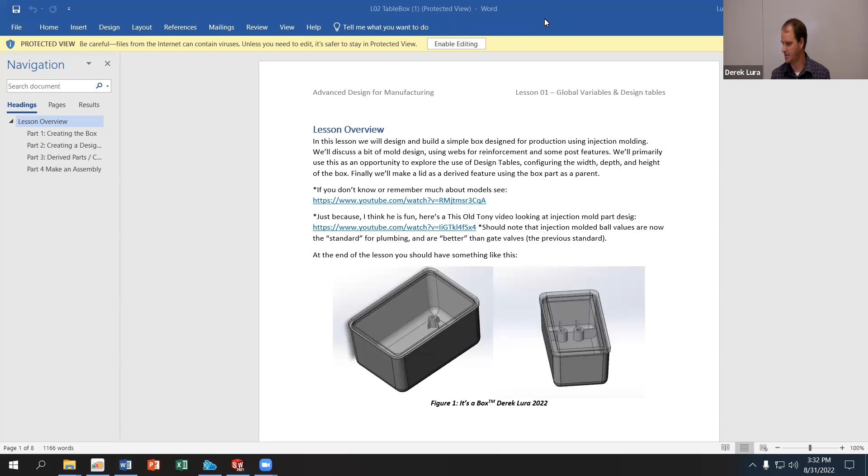We started this off last time with just a sketch on the top plane, and we did a rectangular sketch that is 100 by 60. Then we made that into a boss extrude. We added a 2-degree draft to that going outwards, so you can see it gets a little bit wider as it goes up. It's 40 millimeters tall, and you can see there we have the draft toggled on and we're going out.

After we did the extrusion, we rounded the corners. So we added, I think it was a 5 millimeter fillet to all 4 sides as well as the bottom face of the box.

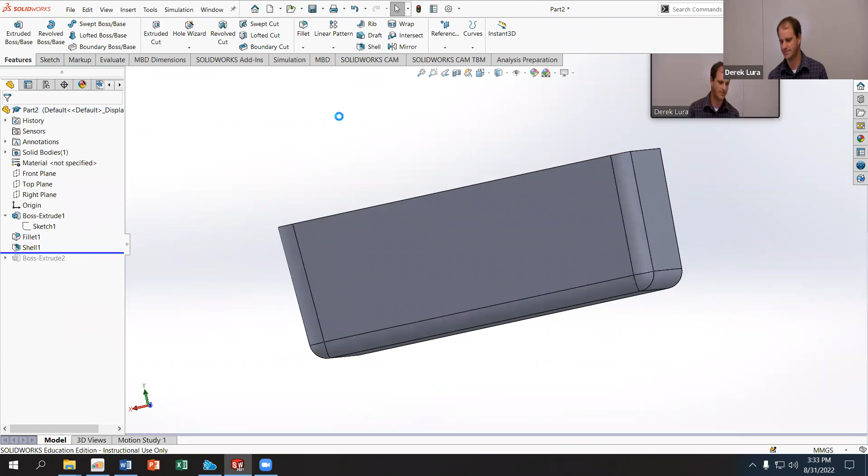Then after the fillets we shelled it out. We talked about the shell tool and how that works, and we used a wall thickness, I think, of 2 millimeters. 2 millimeters is actually a pretty thick box, so if you want something to be reasonably rugged, that will work fine. If you're trying to do just a regular enclosure, like if you think about a Tupperware or a leftovers container, usually there's going to be like a 1 millimeter wall thickness because they're usually pretty thin to save material, and they don't need to really support a load. So 2 millimeters is actually pretty thick for just an enclosure.

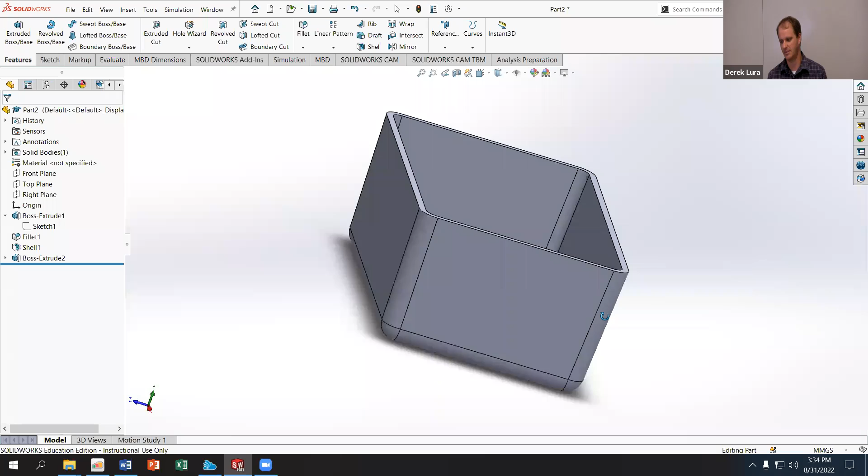After that, we added a boss extrude that we're going to use as a mounting point for something to go inside the box. We haven't really added any features to that, but we did cover some of the options in the extrude. We had it come starting from the face on the inside bottom of the box, and we had to go 8 millimeters up from that. We included the same 2-degree draft, and we had that draft go inwards because we want all the surfaces going in the same direction so we can remove this part from a mold at some point in the future when we decide to do that. So any questions on any of those steps? Does anyone need to repeat any of those or anything like that?

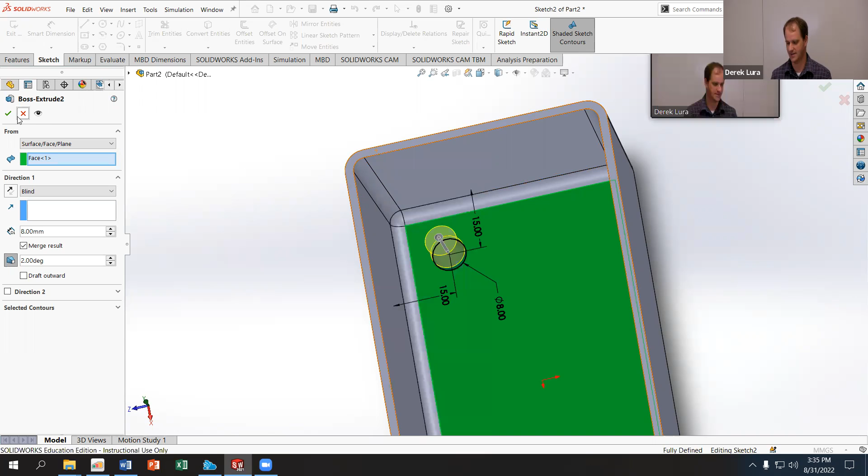For the peg, what we're doing is we're starting from the bottom surface here, and it's just blind from that surface, so this 8 millimeters. Oh, for these 15 here? Yeah, those are going from the outside of the top edge of the box. So if I look at the sketch here for this one, you can see it goes to the outside of the top edge of the box. And it's going to be 8 millimeters at the base, and it's actually going to be a little bit thinner than that as it comes up.

The next thing I'm going to add to this is a rib. A lot of times we use ribs to reinforce parts, so we can have something thin but also make it stiffer by adding a rib to it. You see this very commonly in injection molded parts. Ribs can also help with material distribution, adding an extra channel that plastic, or even metal if you're doing some kind of die casting, can flow through to help distribute material more efficiently through a part.

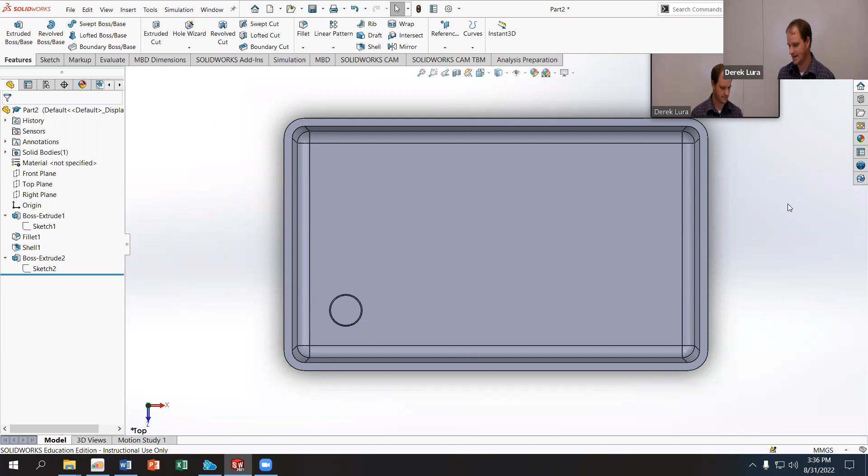In this example, we want to add a rib that's going to connect our support to the side walls of the box, just like shown here. The nice thing about ribs is all we really have to do is specify where we want them to start on a plane, and then draw one side or the center of the ribs, and it'll calculate the endpoints for us. So I want to show you guys that real quick.

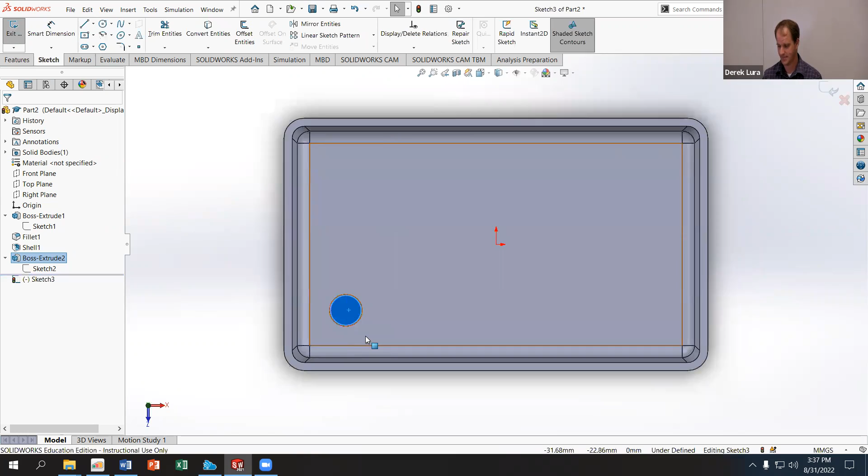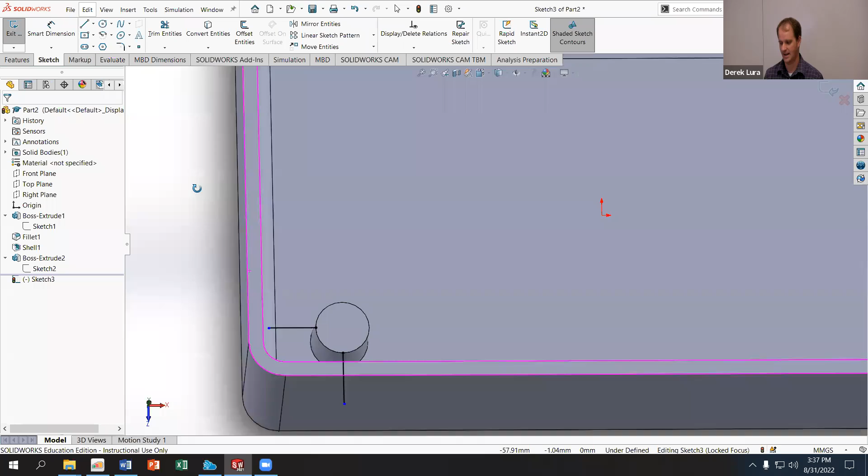I'm going to have this sketch on the top surface of my support because that's where I want my ribs to start. I could have them start anywhere else, but in this case I want them to start there so they're all flush with the top of my circle. So I'm going to right click on that and sketch on that surface. I'm going to draw a line that goes from the bottom of my peg out towards the side of the box. It doesn't actually need to go all the way. Then I'm going to do the same thing going from the side of the peg out towards the side of the box. Once I have those two lines, you can see them there, and I can see that they are on the top of that surface.

I can go to my features and use the rib tool. I specify how wide I want these to be. I think I want them to be 2 millimeters so they match the size of my box, but let me check what I used inside the walkthrough. Looks like I used 1 millimeter for the thickness in the actual walkthrough, so we'll use 1 millimeter and then we'll draft out.

So 1 millimeter, and you can see here the rib thickness. You can make it go on one side of the lines, the middle of the lines, or the other side. It's a little bit complicated when you have a bunch of them on there as to which side gets used, but pick what you think is best.

We want to draft this. I'm going to do a 3-degree outward draft, and I want outward because I want it to get wider as it goes down. On the peg, we did an inward draft because it got narrower as it came up. We'll be able to see that a little bit better once we generate it.

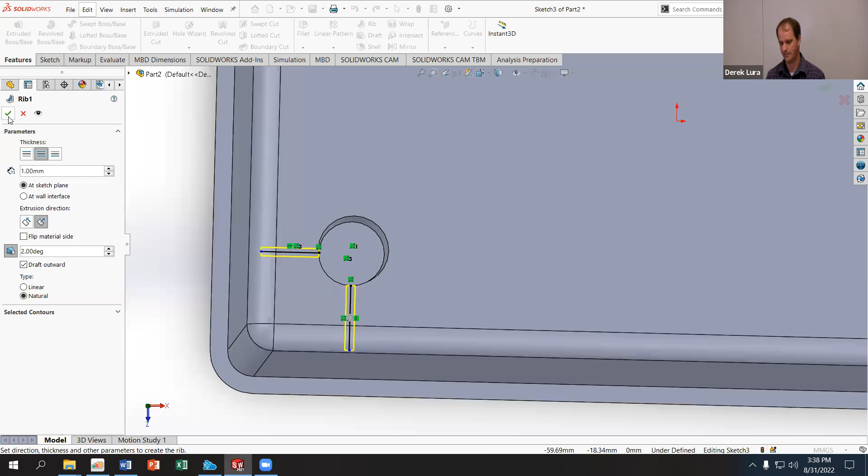So note here that the end of the rib got filled in. I didn't need to extend that rib all the way to the side, which is nice, because in my drawing, that line - I don't know where it would end up intersecting this plane. So it's easier for me to have that line kind of end before it gets to the wall, so the tool is not confused as to where it should end. It just needs to end whenever it hits a face. Does that make sense to everybody?

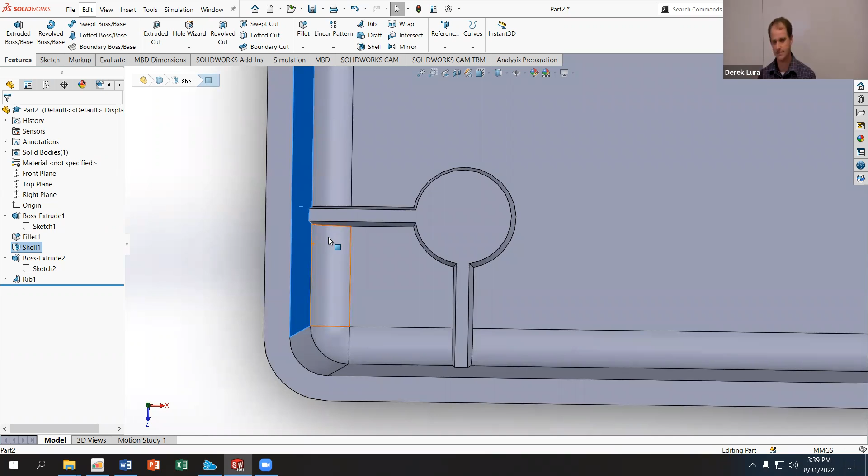And I can confirm that my draft is going in the correct direction because you can see that it's getting narrower as it comes up. Anyone like me to repeat that real quick? Or even repeat it real slow?

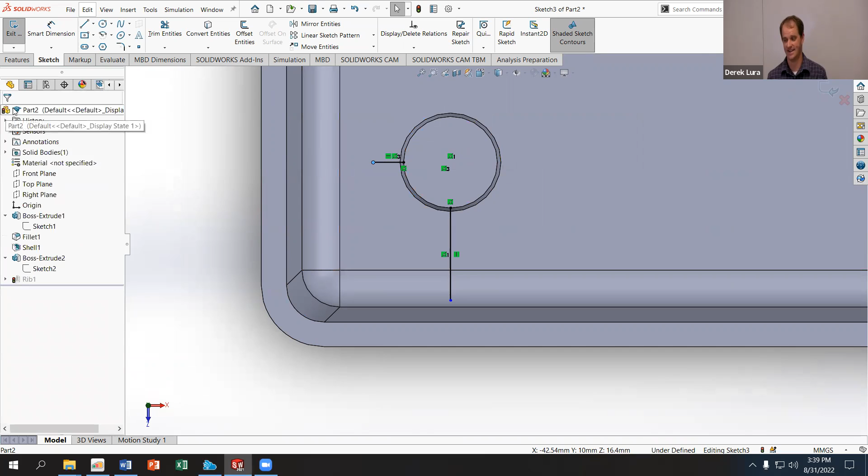Yeah, we want it to end before it gets to the sides. And I could drag this out to here, but then it gets confusing about whether that's going to come out past the outside of my box. Because I don't know - the wall of my box is somewhere between this line down here and this line up here at the height that I'm drawing this line at. So I don't really know where the end of this needs to be on that surface. But I don't need it to go very far at all, because it's going to project that line out until it contacts something. That make sense?

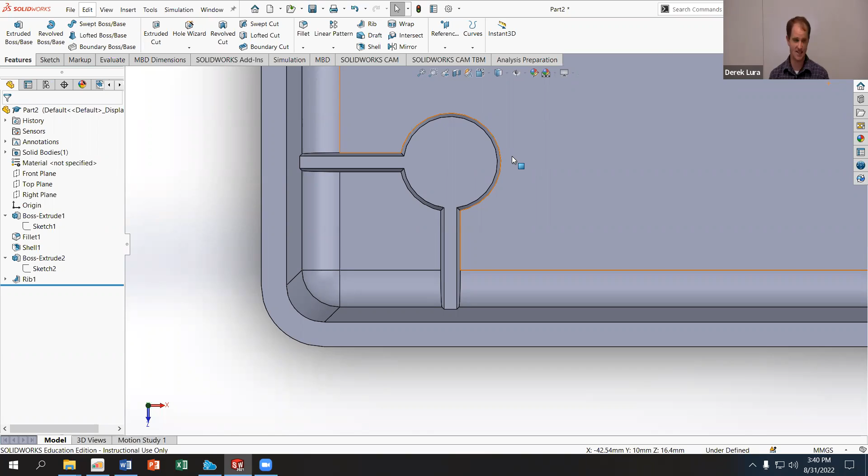Ribs are almost entirely inside parts, but they don't have to be inside something that's totally enclosed. You can have it start like on a shelf and then go down to a lower shelf and it'll fill down below - it just needs to have something below it for it to work. You can also specify ribs to go in a different direction than how you sketch them if you want to, but most of the time you want to sketch them on the plane that you want the rib to start. But if I wanted to have a rib that went kind of opposite direction because of the geometry I'm trying to get, you can do that.

I'm going to add a hole to this so I can actually mount this part. I don't remember what size hole I was going to use. Metric M2 X 0.7 - that X on the 0.7, that's the pitch of the thread in metric. So we're looking at an M2 hole and probably threaded using just an ANSI default.

So to get that, I'm going to go into features, hole wizard. I want a metric screw. I'm going to do a tapped hole, and then go to my M2 and look for an M2 X 0.7. I don't have an M2 X 0.7. Is it M4? I said M2.

Oh, it must be a typo. It's M4 in the picture, which is probably correct - that should be M4. I don't know why, it still says 2... 4, oh, I'm not editing, that's why. That's okay, let's do M4.

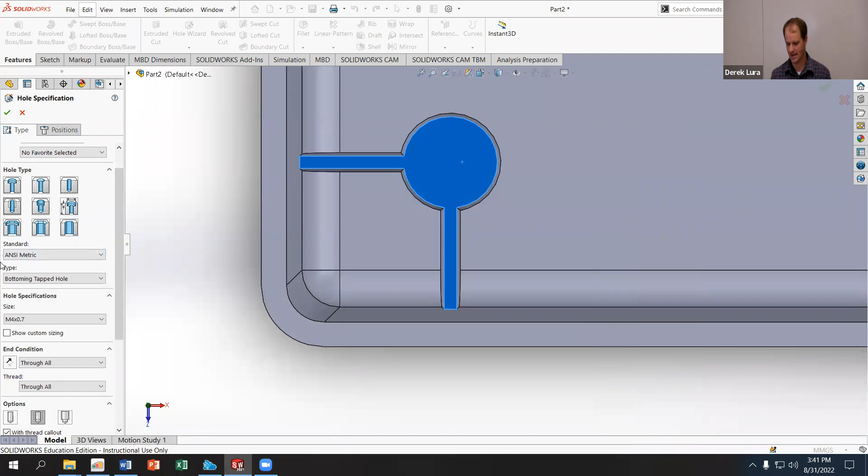M4 X 0.7. The position, I want it to be in the center of this. I'm going to highlight over the edge of my circle, wait for that kind of center point to pop up, and then click on the center point. Then all I need to do is specify how deep I want this to be.

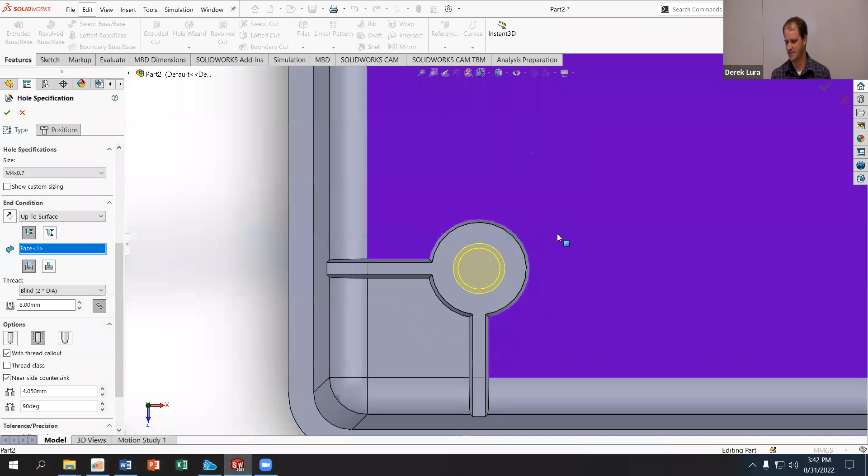So I'm going to go to my options, and it looks like this. I want it to extend up to the original bottom of the part, so instead of using through all, I'm going to do up to surface, and then click on the bottom surface of my part. And you can see that it actually ends that hole right at that position.

And then I'll accept that. This one has a near side countersink. I don't know if the one inside the sketch has a near side countersink. Looks like it might.

If you don't want the near side countersink, which is this little fillet on the top, you can go into the tools for it. My SolidWorks is freezing, let's give it a second. There it goes. You can edit, scroll down, find the near side countersink, and just toggle it off.

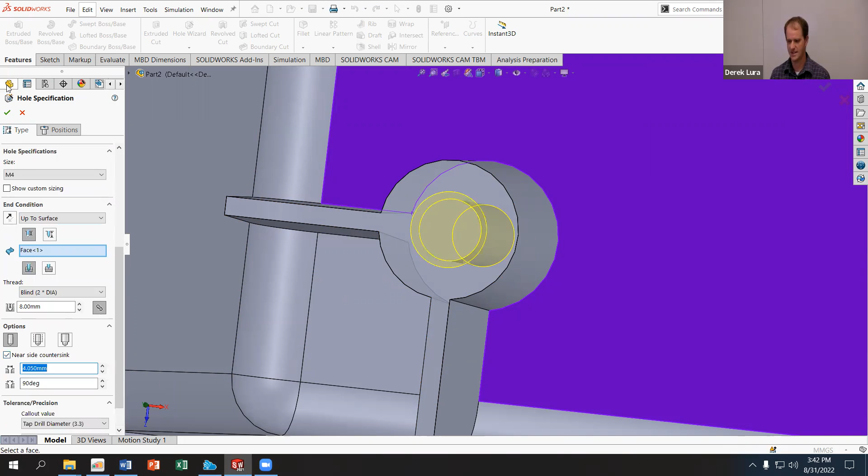Just like countersink is actually nice to have. It makes it a little bit easier to align the screws. So especially something like this, where if you're going to be putting a PCB, a circuit board, into an enclosure, getting the screw to line up just exactly right can be difficult. So having a little bit of a countersink there can help you line those up a little more easily.

Oh, and you okay back there? No? Crash? Waiting for it to reload. It's crashing on a repeating basis. Yeah.

I think all the way to the front, and then yeah. Great, you're doing that already.

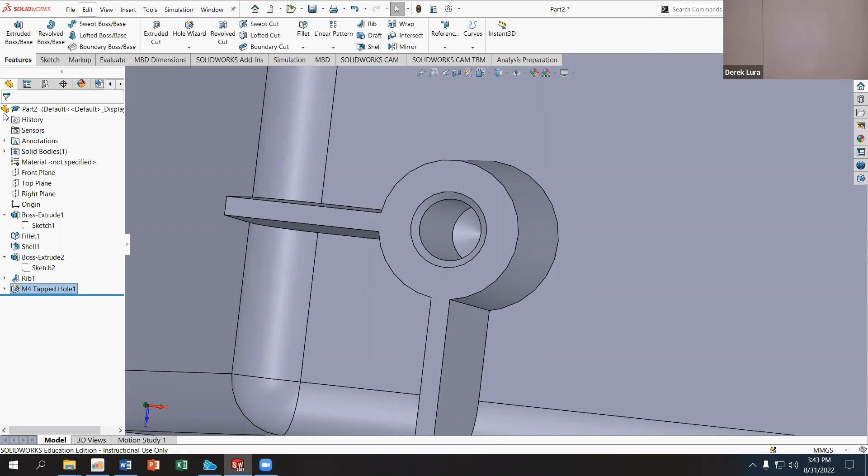So I'm going to click on my boss extrude, my rib, and my hole. All those, as well as my... I can use the front plane or the right plane, doesn't really matter which one I start with. Oh, wrong selection, I want to get all those and my right plane. And then click on the mirror.

The nice thing about the mirror tool is if you have one plane and a bunch of features selected, it's going to automatically know which one to use as the mirror plane. So I'm going to accept that.

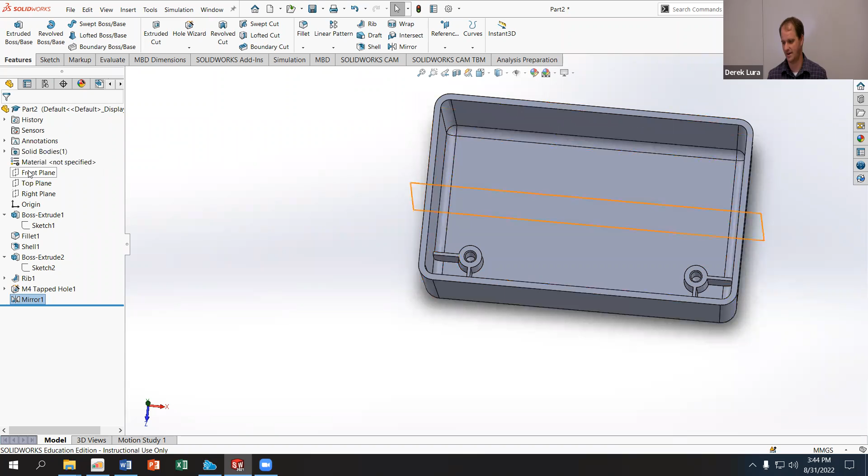If that didn't work for some reason, I'd try using a geometry pattern, just as a note. So if you try and mirror something that doesn't work, try mirroring it as a geometry pattern. It should work fine. I'm going to mirror the mirror to get the other side.

And now I've got a nice box set up right there. Good.

All right, I want to show how to use the mounting boss tool in case you do end up in a situation where you're designing something like this and you want to expedite the process a little bit. It's pretty easy to use.

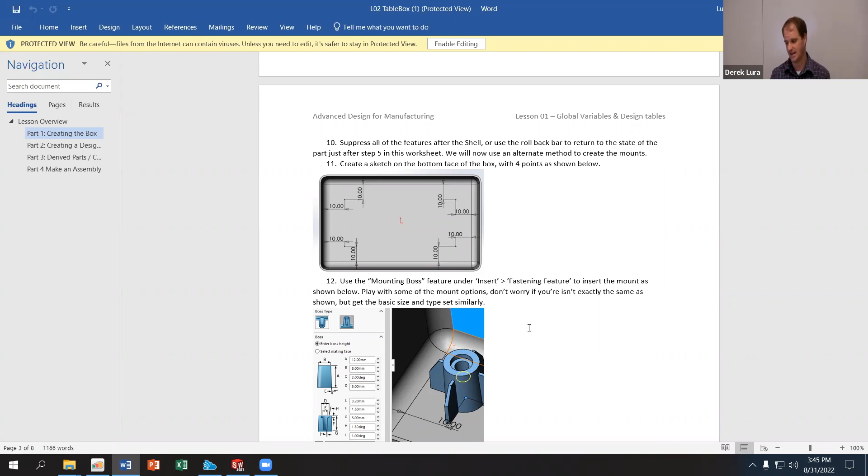All we have to do is specify the size of the boss we want to use and the locations. So what I'm going to do is suppress everything after my shell.

And then I'm going to do a new sketch on this bottom face. Let me see that sketch there. And then on that sketch, I'm going to define 4 points: 1, 2, 3, 4. I'm going to make all those points at 15mm distances from the sides.

You may be thinking, can't you just do that and mirror it? Yeah, I can. But the way this tool works, I specify the parameters that I want for each of the mounting points. And then I specify the parameters that I want. So it's pretty easy for me to generate a lot of different mounting points using this tool.

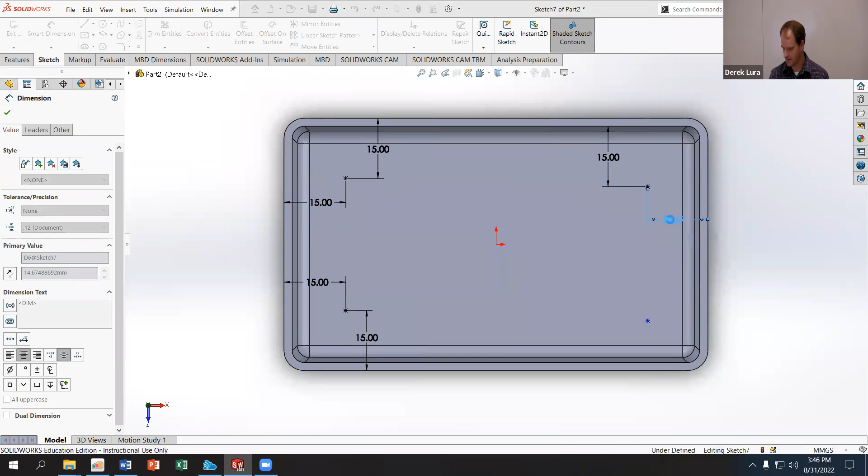Hopefully it makes sense to you all that if I was doing this for real, probably I wouldn't want all these positions to be mirrored exactly. I would probably want specific positions for each of the mounting points, as a function of what I'm putting in place. And so specifying the locations like this makes it a little bit easier for me to scale this to something else in the future.

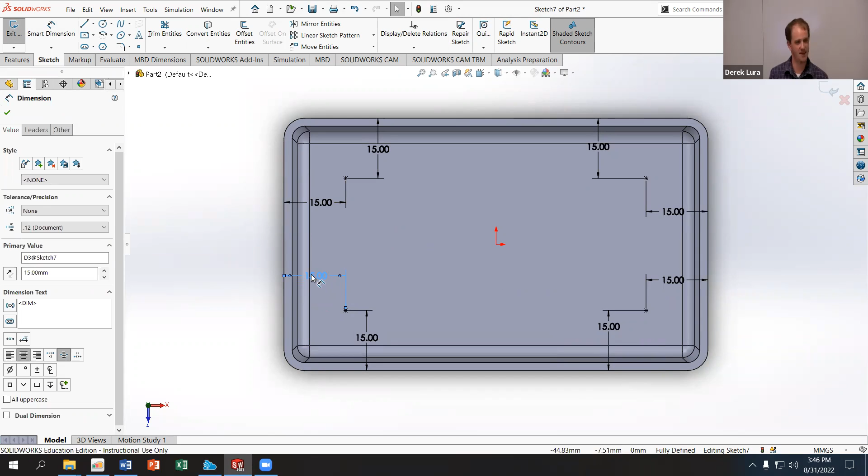I've got 4 points, all of them 15mm from the sides. If you want to use something besides 15mm from the sides, as long as it's reasonable and close to what you have here, it'll work out okay. If you get it too close to the middle, when we shrink this later, that'll be a problem, but don't worry about that right now.

Everybody good? Everybody will get, maybe except Owen, everyone will get the 4 points on the sketch? All right.

So this tool, if you don't know where to find something, again, I suggest using the search command. So if I search for mounting boss, I can show that right there. I should be able to just click on the little icon and it'll show me where to find that tool. So I'm not using my mouse right now. I just clicked on the little eye and then I waited for the computer to say, hey, it's over here.

I like the way that if you don't click on it right away, you just wait. It's just a little arrow. I'm gonna do that one more time so you can all see it. I searched for mounting boss in this tooltip, and then I clicked on the eye, and then I didn't touch anything. I'm not touching anything. And it just highlights it. It's right there.

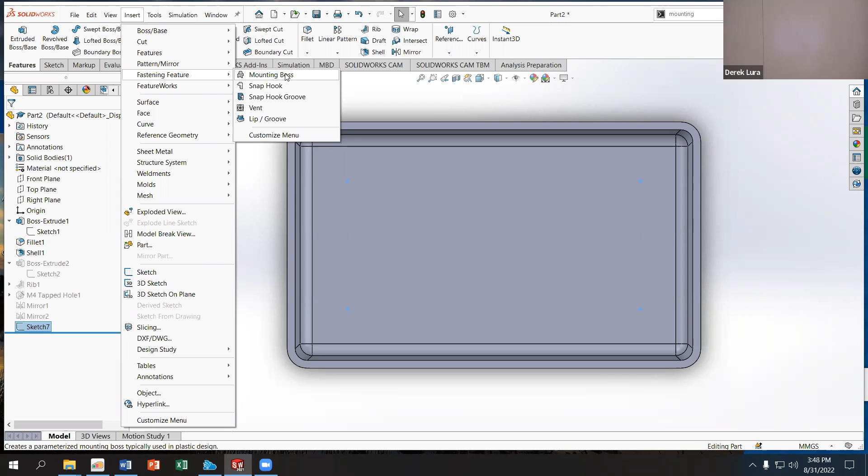Now you don't have to actually search for it. You can just click on it from the search and it'll open the tool for you. Most of the time, if I have something that's not inside my default bar here, I'm not going to bother finding tools for it. I'm just going to do search. There it is. Click on it and I've got the tool. All right.

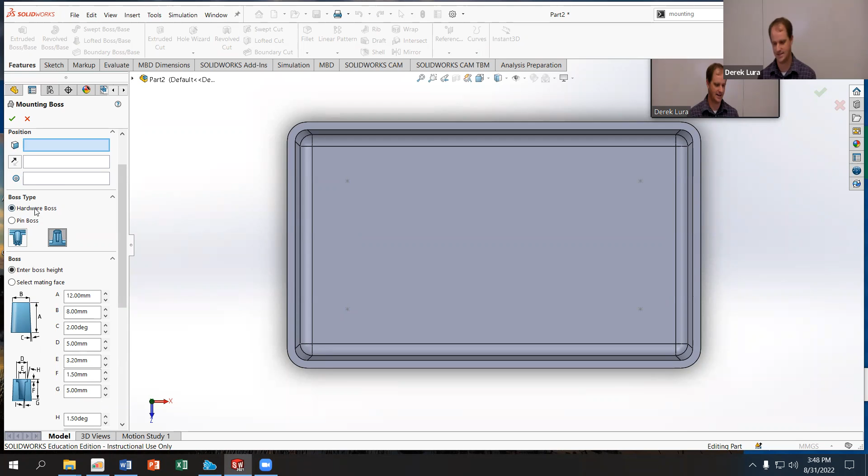So here's the different options here. So we have hardware boss, pin boss. We can have a head or a thread. It better matches what we had before if we use a threaded boss in this case. And my positions, what I want is I want the points on my sketches here.

Did I use a sketch pattern on this? Maybe I used control. No. Let me check my notes. I did do a sketch pattern. Okay, never mind. I'm just going to do one and then I'm going to pattern it. I think I just did that to show you guys how it was. So that gives me the position of the first one.

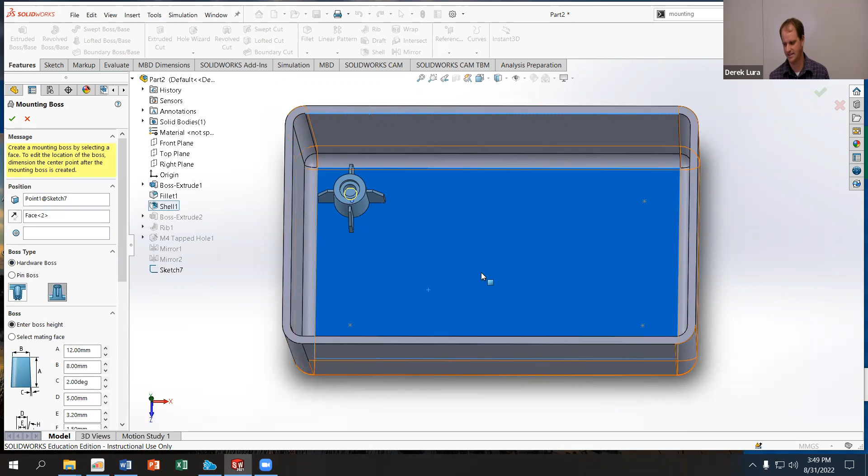I don't like them having this arbitrary orientation. So I almost always specify the direction of it. And you can use, I think, any face for this. Ooh, that's not good. We need a flat face. Where's my alignment? Oh, here are the fins. There you go. So this is the position, this is the orientation of the actual mounting hardware. Then I scrolled down to the fins and I made them align with this edge. And that just keeps them nice and square.

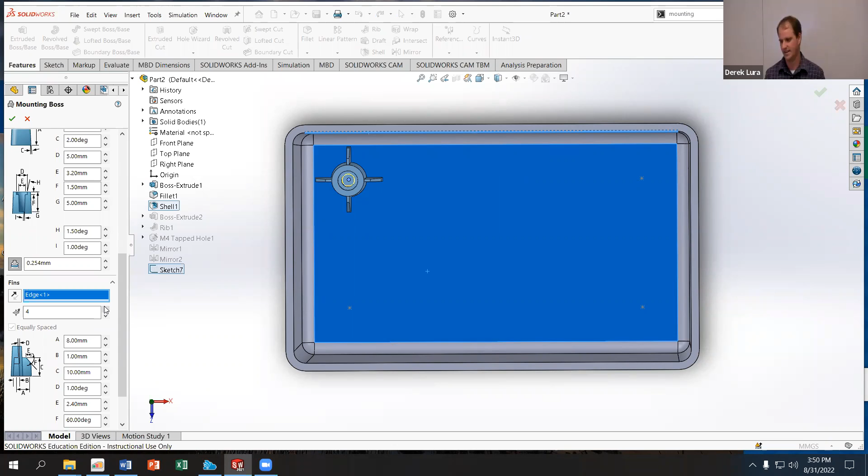You notice you can change the number of fins here if you want a stronger boss or a weaker boss. It's up to you. And again, how much force, and specifically lateral loads or bending moments, are going to be applied to that will determine how thick and beefy you want the fins to be relative to the main post.

Now here we have the boss height. I actually want this to be 8. And then if I want to change the other values, I can modify them as much or as little as I want to. They need to be based off of the height. So if you go too far off, it's going to complain at you.

So let me do this whole thing one more time. So I went to the mounting boss tool. The position, I picked on this face or the point. The alignment outwards is normal to whatever face you selected. And then the fins, if I scroll down to the fins, I can click on the direction arrow there. And then I use this top edge to align the first fin.

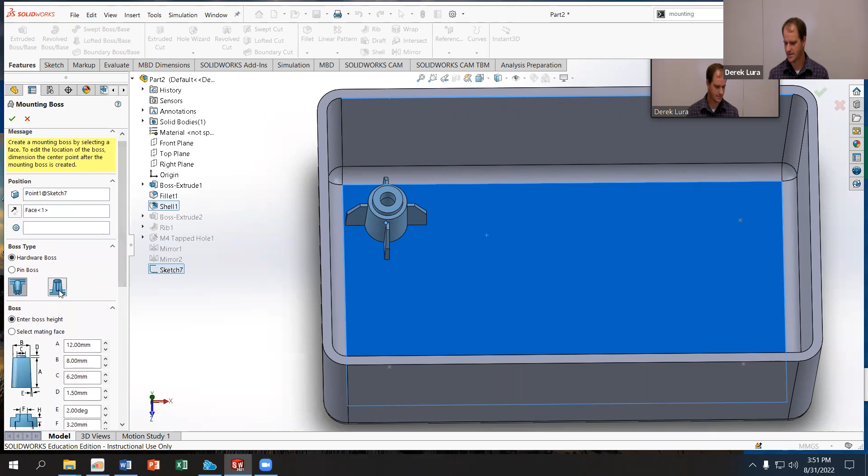You'll notice that we'll always have one fin parallel to that line if I do that. And the rest of them are just equally spaced. You notice this equally spaced is kind of hard checked on. I can't uncheck it. Or it's probably good. I thought there was an option here to specify the screw size. No, I don't want pin. I want it to be threaded.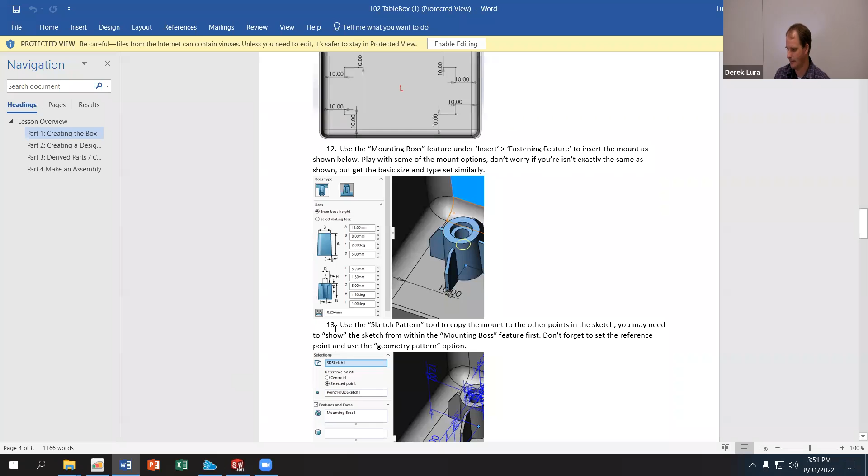The E is the actual hole size in the pin. And right now it's 3.2. So that's all the parameters. You can save these out. I don't know why they don't have defaults for different size screws. They probably should. Doesn't matter that much though. I think in the sketch I just use the default. Yeah, I just use the default sizes. So I just use a hardware boss of the default size.

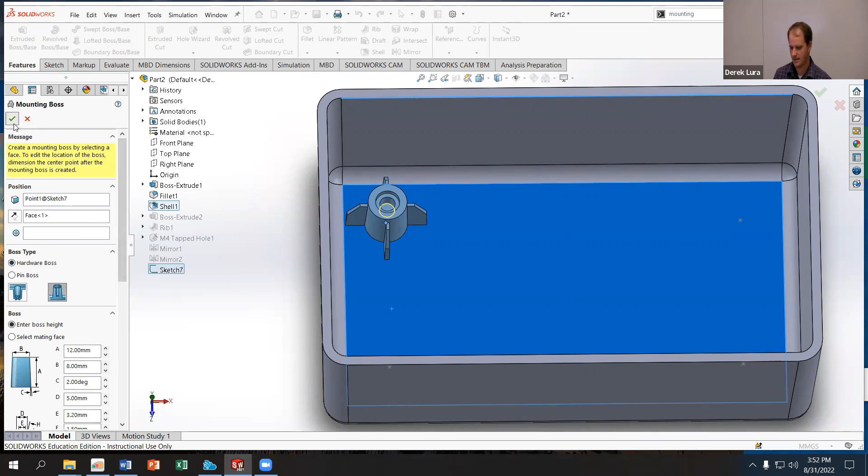What did I click? I clicked on something I wasn't supposed to. I probably changed one of the sizes of the fins or something. I'll just hit cancel. I'll go back in, I'll do it one more time, and I'll leave all this stuff default. Go. There's one. And then what I'm going to do is I'm going to pattern this using a sketch pattern on the pattern.

Oh, I didn't actually change the size of the face. You make that 10 probably. I think it has to be bigger than this. Yeah.

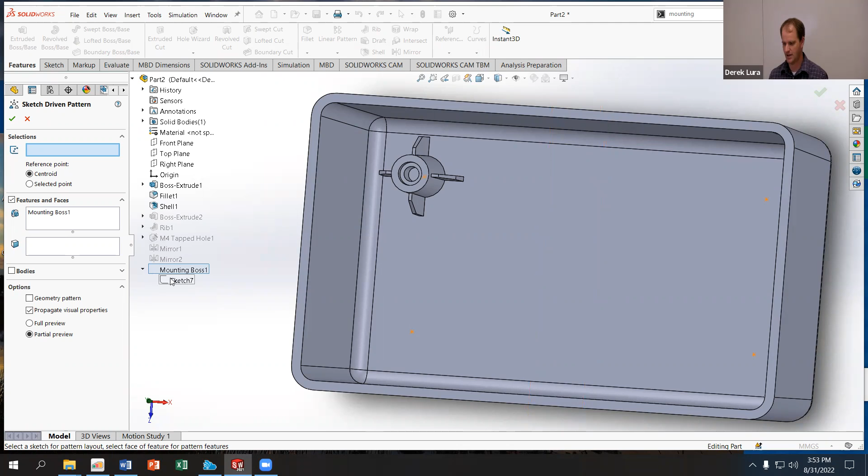I actually want to drive this sketch pattern from my sketch that I had before with my points and accept it. And I'll do a geometry pattern. The sketch driven pattern is nice whenever you want to have a lot of something and they're not just equally spaced. So in this case, they are equally spaced, but I can move the position of any of those locations very easily now inside my sketch.

So if I decided that I did want one of these to be like 18 off the side, so they're not symmetric, it updates very easily. So just knowing some more tools. Yeah.

Oh, yeah, so whenever you get an error doing a pattern, your first check should be try doing it as a geometry pattern. And most of the time that'll resolve your errors.

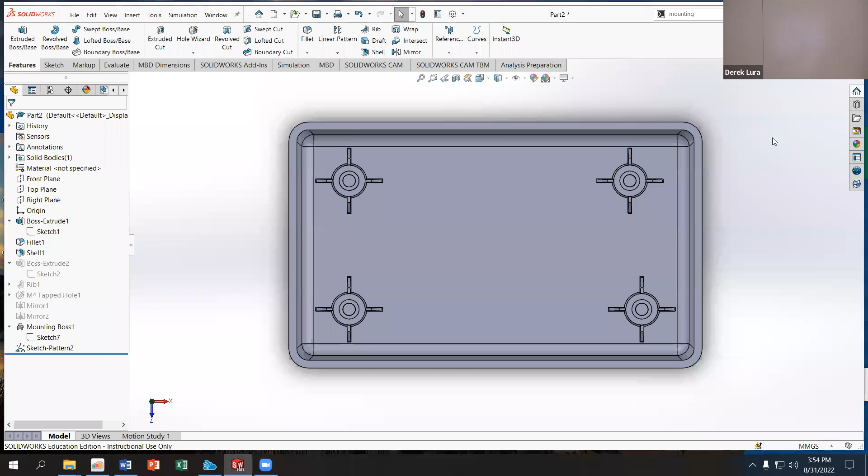Okay, let's talk about design tables. So in this case, I've got two different configurations of a box. I have one using the mounting pins and one using some customized holes. And so what I want to do is make a design table that lets me toggle between those values as well as the size of the box based off of the length and the width.

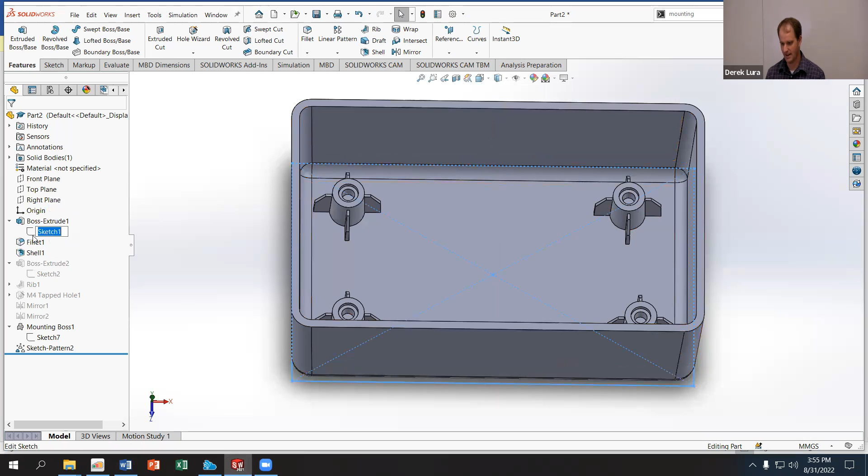So one of the things that's helpful to keep track of what those different things are is to name your dimensions and your features. So I'm going to go into my sketch and edit sketch 1. And where it says 100, I can click on that. And you see here is the D1 at sketch 1. I can change this to width. Now this dimension has the name width, and I know that that's going to be the width of the box.

I can do the same thing on this one. I'm going to call it, it's not height. Maybe I'll make that length. I probably should have made it length and width, but whatever. Flip them if you want.

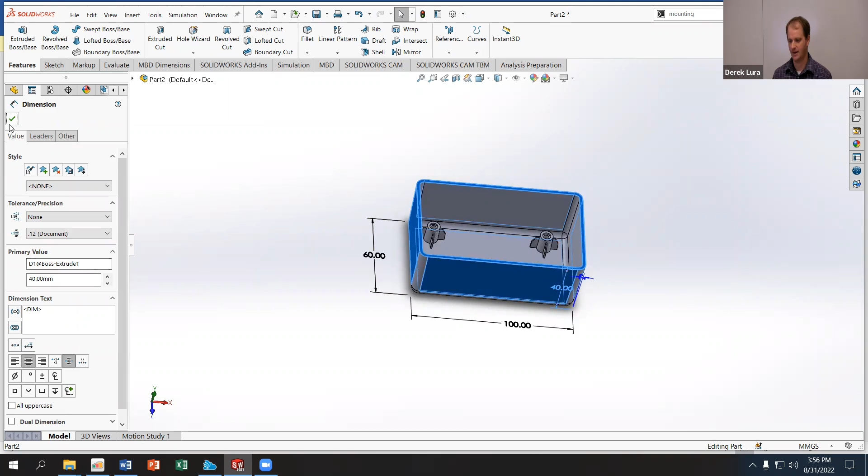I can do the same thing for my boss extrude. This is D1 at boss extrude. The way I got that out is I double clicked on boss extrude. You can see the height of the extrude here on the right. If I double click on the height, it brings up the dimension text and I can change this to whatever I want. So I can make this height. So now I have a length, width, and height. And you can do that for as many or as few features as you'd like.

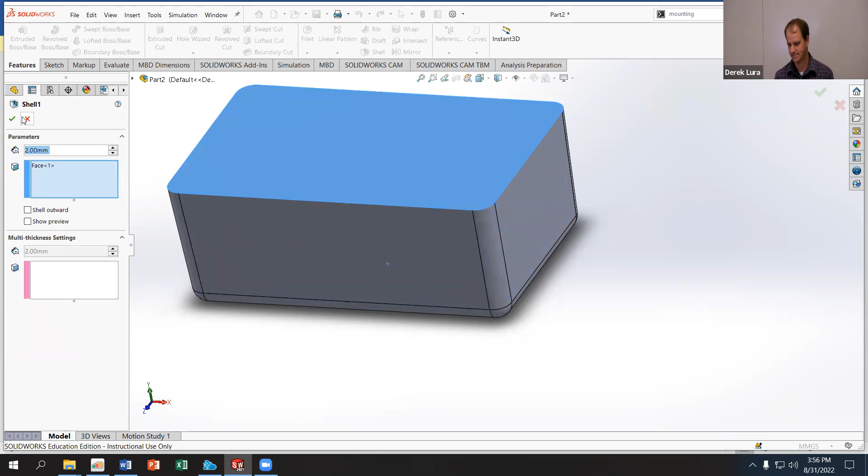The shell, double click on the shell, click on the 2. I can make this thickness, whatever I like. Now this is different from a global variable because I'm just naming a specific dimension.

And you can call named dimensions in functions. So if I want to, I can make the length a function of the width by just saying equals to width at D1 or width at sketch 1 multiplied by whatever I want. And that'll go into the equation just like global variables. But really, this is just acknowledging what the different things inside the sketch are.

And I can name the features themselves as well. So I can make this main extrude. Add in some rounds. I don't know. Whatever you want. Doesn't really matter. The important thing there is that adding the names makes it easier for you and your team members to identify what those features are doing inside your design.

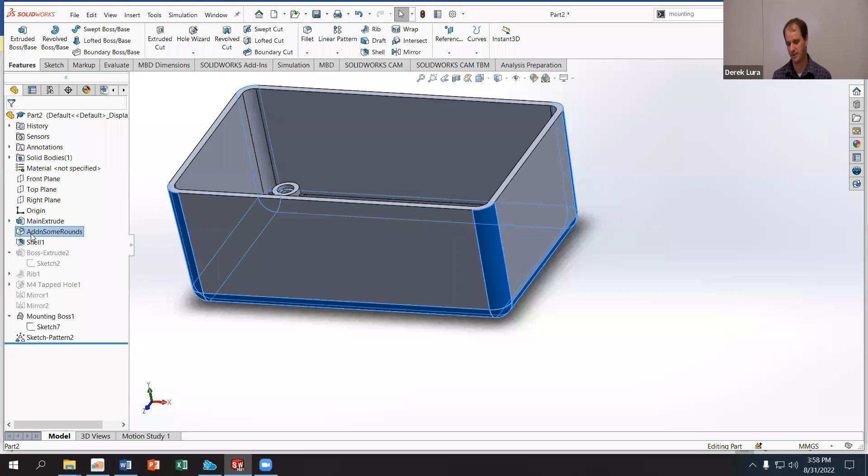So as you get more and more complicated designs, you can find these things with some reasonable amount of repeatability. And in our design table here, it helps because I don't get to see what all those things are when I'm making the table.

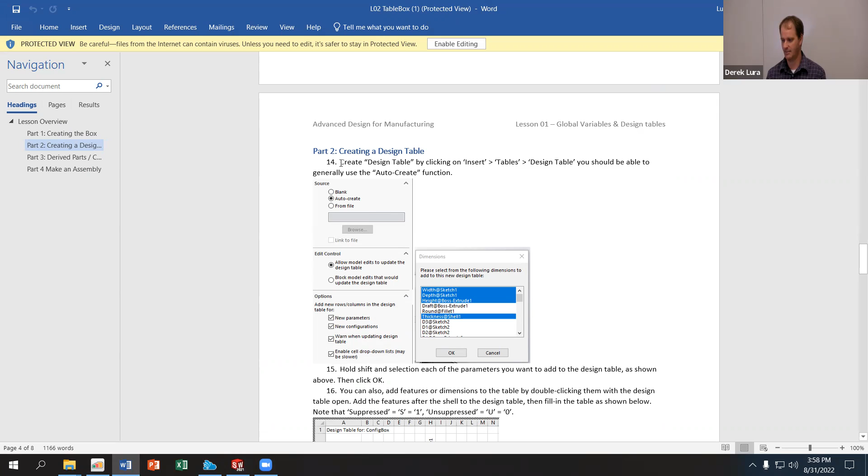Okay. So let's try making a design table. I'm going to go into design table. Again, it's insert, tables, design table. I can go in here and do design table, or I can go to insert, tables, design table. Either way. So if you remember where design table is, you can pull it out of the menus. If you don't remember where it is, just search for it from the command search. As long as you know the name of it, you're good.

You have options here. I can make a blank design table and then add things to it. I can auto create it from things that exist inside the sketch, or I can load it in from a file. Loading it in from a file works like the text file that we used before, although it uses a CSV, a comma separated value format, rather than just a raw text file. And then you can say, do you want to allow model edits to update design table, or do you want to block it? Do you want it to be one-way or two-way? I usually leave my design tables as two-way, so that way you can make changes more easily inside SolidWorks.

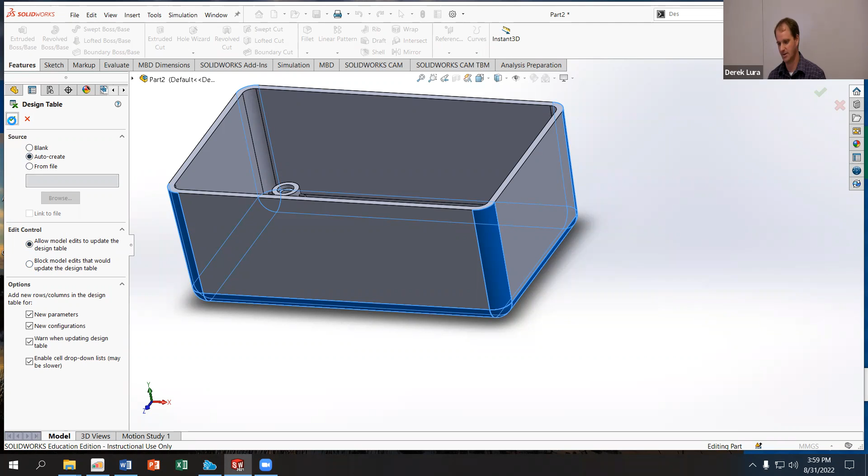So I'm going to start with auto create. Click on the green check mark. It's going to ask me, what do I want to include inside my design table? And I want the width, the length, the height, I guess the thickness too.

I feel like I always get a scam call on this class. It's so weird.

And then I also want to include the mounting boss. What's that? The thickness of the shell, yeah. I also want to include some of these features, although I think I maybe add those later. Let me check my worksheet here. Yeah, so I add those later. So I'm just going to add the dimensions in, and then I'm going to add the features in after the fact, just because it's easier to do it that way, I think. So I'm going to add these for width, depth, height, and thickness.

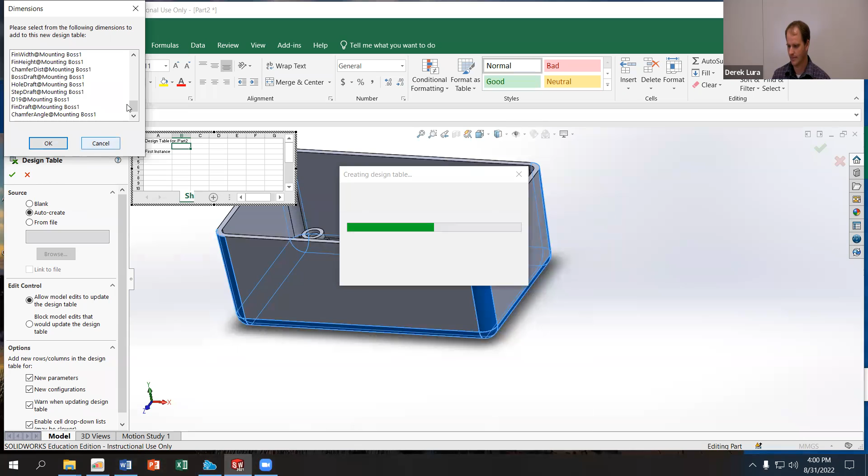Click OK. You see it pulls those into the design table. And then I want to add my boss extrude, rib, tapped hole, mirror as additional features inside my design table. Let me make this a little bit bigger so we can see it a little better. So to add those, all I'm going to do is have the design table open, and I'm going to double click them, and it's going to add them to that list. So I'm going to click on boss extrude. You see it added it to it, rib, tapped hole, mirror.

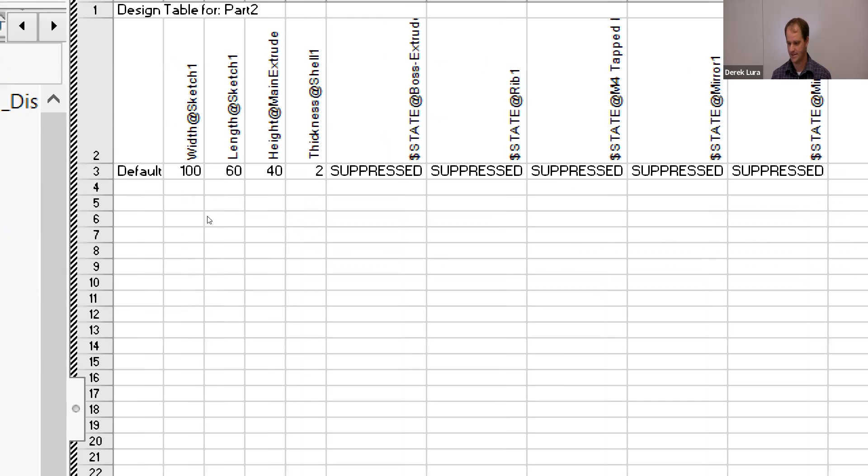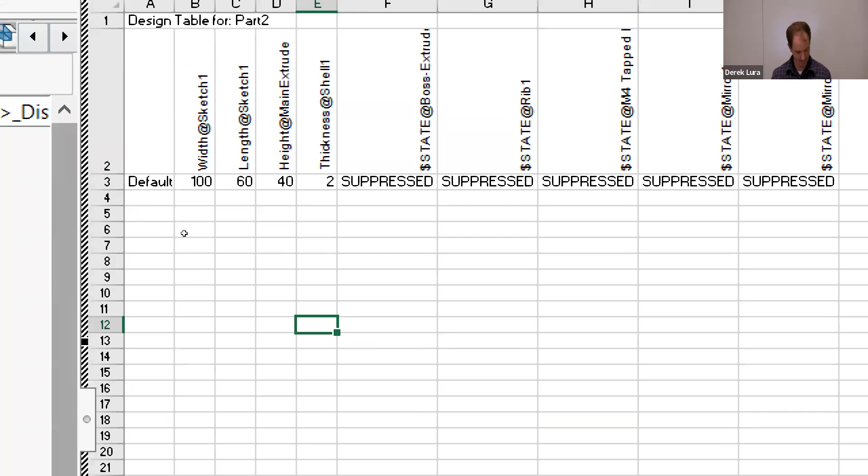And can I zoom in on this? I don't know if you guys can read that or not. I'm going to use the magnifier to zoom in on it. So you can see there's the default, there's the width, the length, the height, the thickness, and then these are $STATE@Boss-Extrude, and the default here is suppressed. So in the design table, this is going to qualify as not showing up in the default configuration. Okay, I want to zoom in so you can see that a little bit clearer. Close the zoom tool. And then I'll also add my mounting boss and my sketch pattern to the design table as well. You can see those listed as unsuppressed.

Now, suppressed, this is something that's kind of confusing to me. Suppressed is 1 and unsuppressed is 0. So if you want to make a shorthand for this, you can also use S for suppressed and U for unsuppressed. But if you want to drive it off of Boolean math, zeros and ones work better. So you can actually make functions inside the design table. Just make sure that you remember that 1 is suppressed and 0 is unsuppressed, which doesn't make sense to me because you would think that it being on would be 1, which is a more common convention, right? So it's just a little bit confusing.

What I want to do here is I'm going to use the design table to define a couple of different configurations of the box. So I'm going to make a big box, double clicking on here. And I want a big box with the, what are we called? Custom mounts versus the mounting hole. So I have big mounts, small mounts, big custom, small custom. So big mounts. Wait for it to respond. I'm tabbing back and forth. It doesn't like it. Big mounts, small mounts. There's probably also a way to change the font on here in the options somewhere. Big, small.

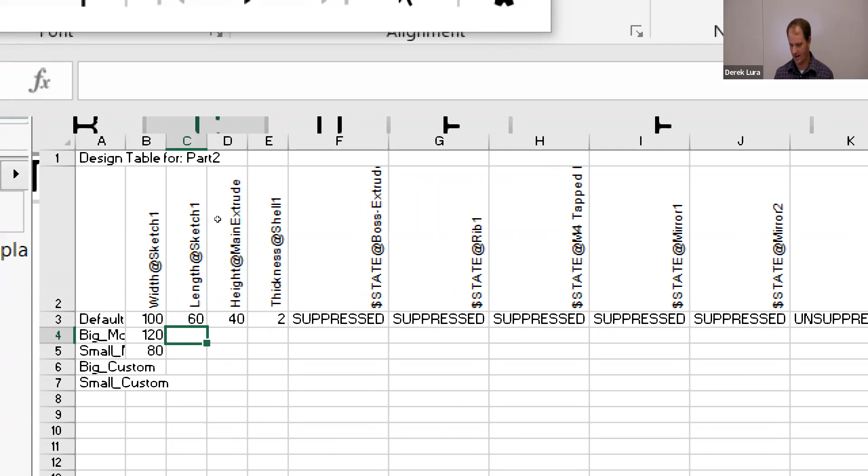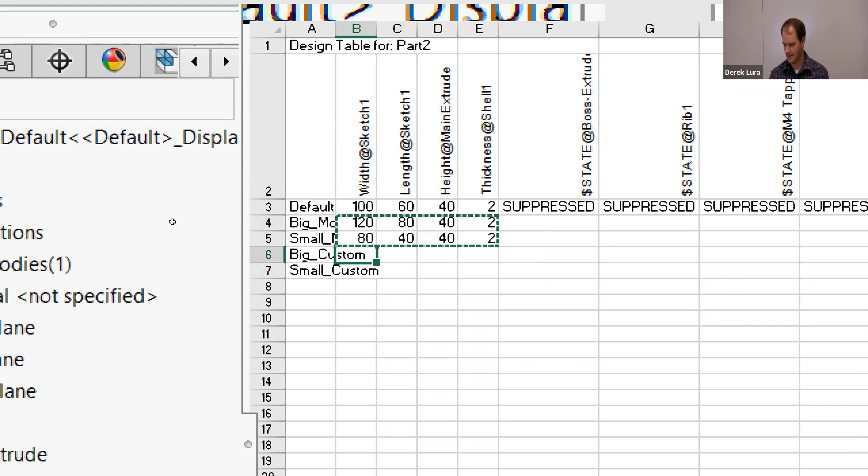The big ones, I'm going to make the 100 into 120. The small ones, I'm going to make the 100 into 80. Yeah, let me try to use the magnifier again. I'm going to add 20 to the big ones on here as well. So 80. I'll subtract 20 on this, so 40. I'm going to leave the height the same. And the thickness I'll leave the same too. Just enough so you guys can see the difference here. And then these ones, I want the same values. So I'm just going to copy it, paste it. Kind of the same thing across here.

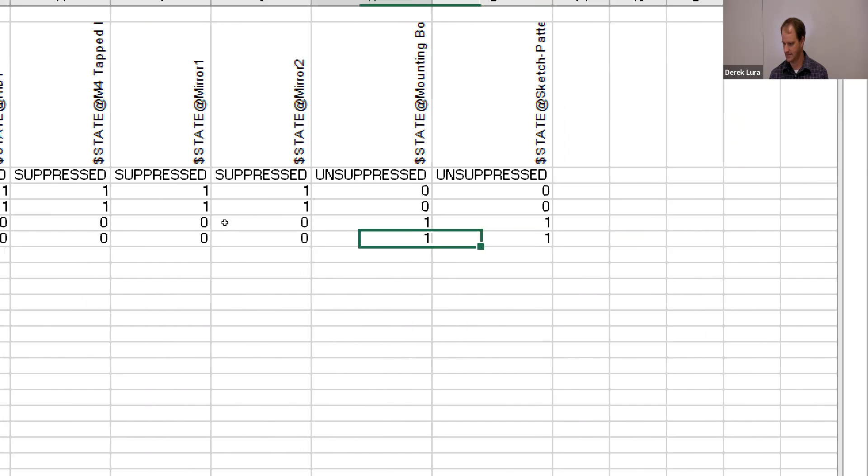Suppressed is 1. So 1, 1, 1, 1, 1, 1, 1. Unsuppressed is 0. I'm going to copy that, paste it in. And then these ones I want to be opposite. I want my custom ones to be unsuppressed and the mounting boss ones to be suppressed. If you can't see that inside here, I don't know what I'm doing because I can't see. Hopefully I didn't break something.

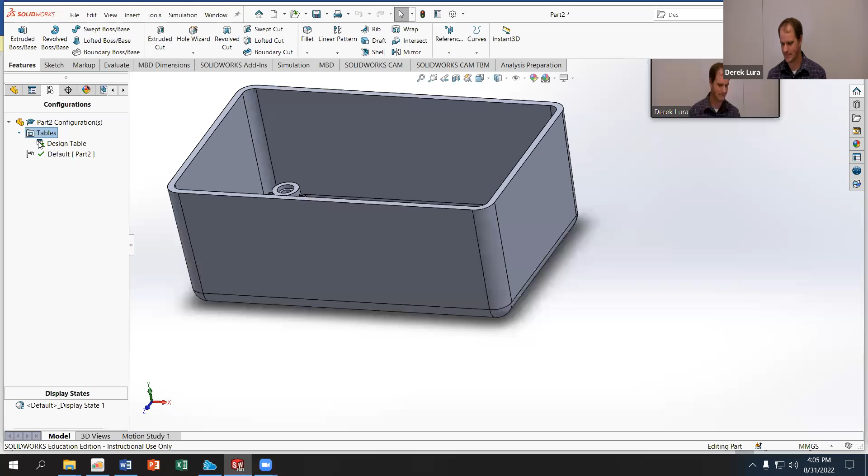Oh, I closed the design table. There you go, it's still saved. Okay. Uh-oh, it didn't save it. Why did you not save? Big M, small M, big C, small C. I should have probably read that tooltip.

You got a question? So if you wanted to add another dimension to this, you click on the thing you want to add with the design table open, and it should add it. Double click it.

I'm just putting in the same values as I had before. When I exit this, it should ask me if I want to add the new configurations, and I should just say yes. I don't know if I accidentally said no last time. Check. Configurations were added. Huzzah.

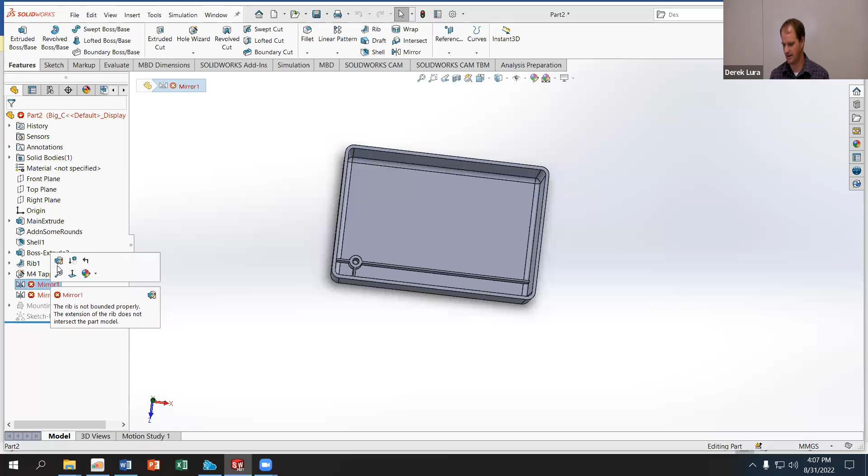Now I should be able to click on any of these configurations, and it should automatically update all the values based off what I put in the design table. Is that? Yeah, it should be the same as in the worksheet. It doesn't like my mirrored features. For some reason, my line here on my rib. Ooh, my endpoints didn't work out.

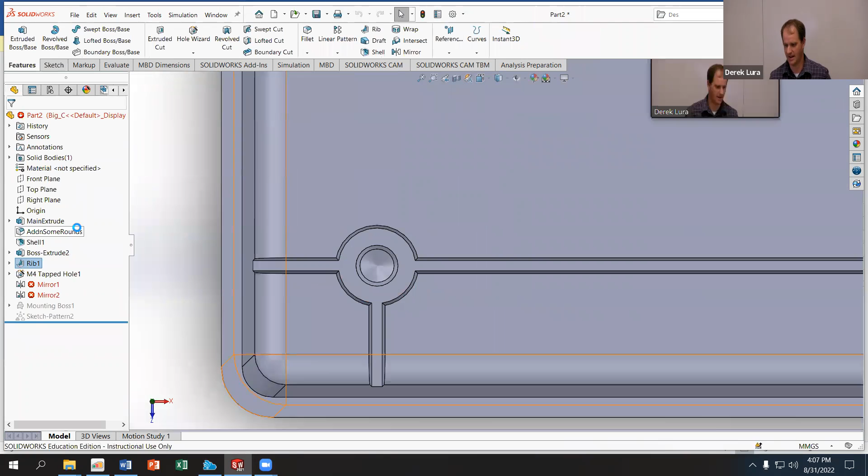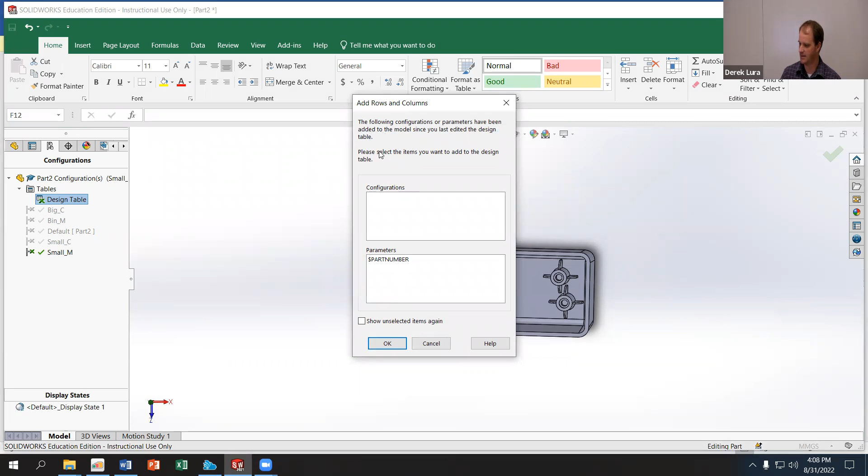And if I want to edit this table, I'm going to go from my main part over to my configurations, right click on it, and then do edit table. Then I can go through and add or remove things to that configuration. Following configuration parameters have been added since your model last edited the table. I didn't actually add anything there. And then once I'm done with it, I can click on the green check mark. And if you've added more configurations, it will add those configurations to the list and update what you said you want to update.

You got corrupted? Your design. Oh, okay. Yeah, no, not at all. But no, man.

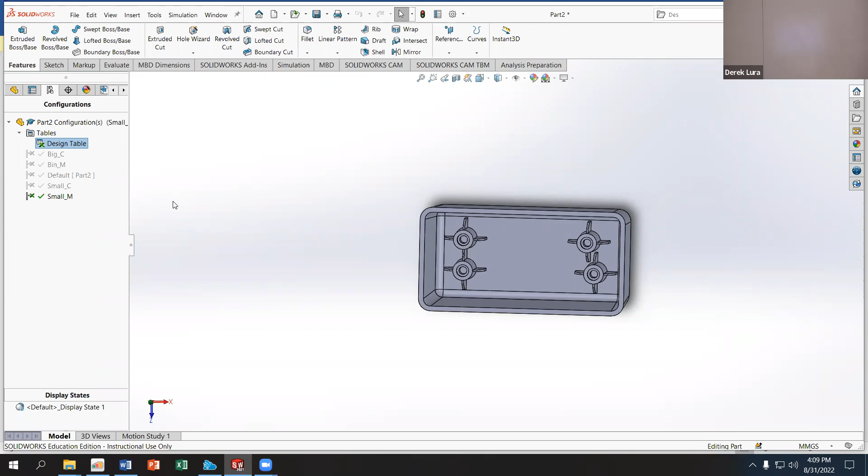You just need to have write permission to the folder where it's making the design table. And if you open the design table in a separate program while you have it open in SolidWorks, that can cause issues, although most of the time it should work. Windows doesn't like having multiple programs write to the same file at the same time. So I'm not sure how tolerant that is to different errors.

I do want to do a quick overview on the derived parts. So what I'm going to do is a new part. And you can make this even if your configurations didn't work, but it's more fun with configurations working. Click on new part, click OK. What I'm going to do is actually drag in my part that I just made.

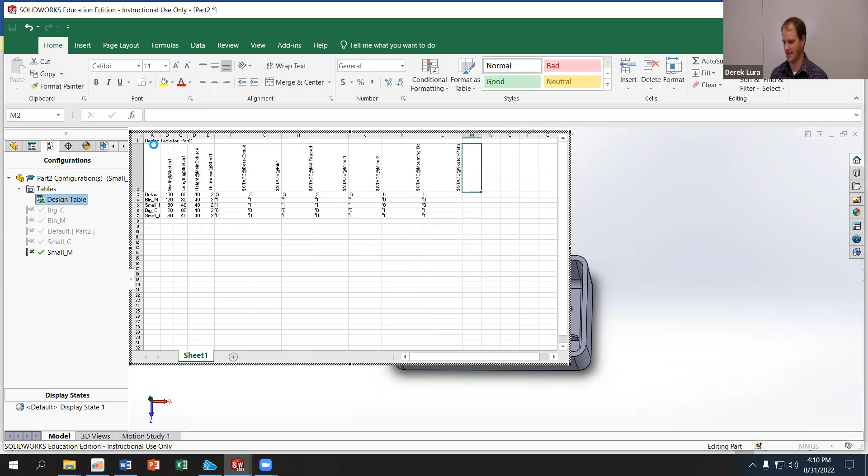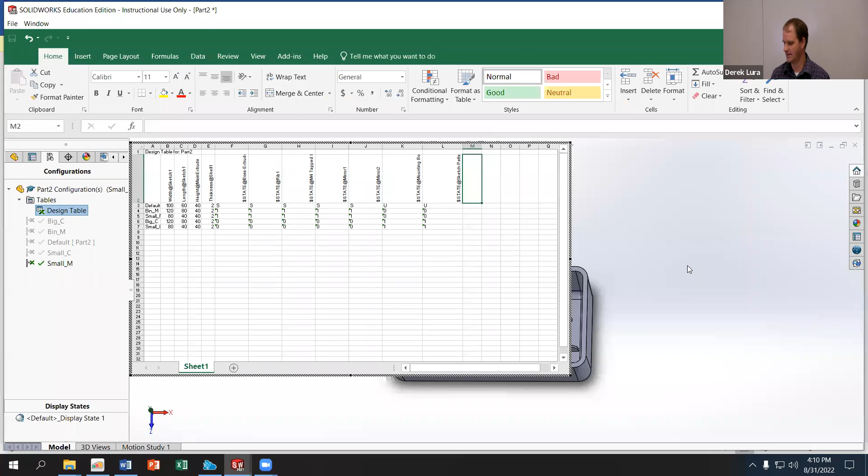Oh, where did I save it? Oh, just desktop. Oh, I just have it saved as part 2. I'm not following my own advice. I didn't save this to a specific folder on my desktop. Oh, week 2 box, yeah, box, okay. Oh, it's on my extra S drive though. That maybe is not smart. Yeah, I want to save the spreadsheet and the part. Why is it opening it? No, that's fine. File, save as. Okay, there we go. Box. So I should have it on my S drive.

I'm going to navigate to the S drive on my computer. And I'm going to drag my box into a part, almost like I was making an assembly. And it says, are you trying to make a derived part? I'm going to say yes. And then I don't want to click anywhere on here because, just like in the assembly, I don't want its position to be arbitrary. I want it to be aligned with the origin. So I'm just going to click on OK.

And now what I have here is this part in my new part, and it has its own body. What I want to do is make a lid that fits my box perfectly, regardless of the size of the box. That make sense? How did I add this to the part? So I'm going to make a new part.

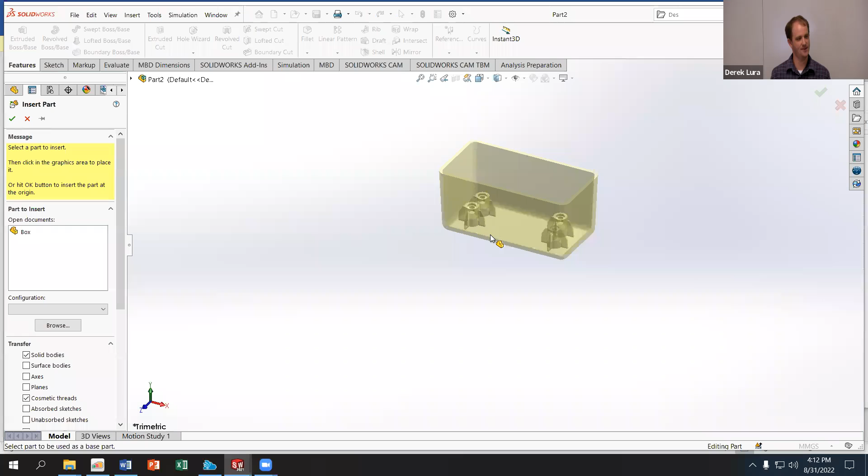From this view where I have a blank part, all I'm doing is I'm dragging my box part into the workspace. It's going to ask me, am I trying to make a derived part? And I'm going to say yes. And then after I have that, I'm going to click on the green check mark. So that way I'm putting my new part origin and my derived part origin at the same spot. So my origin is there at the middle of the bottom of the box.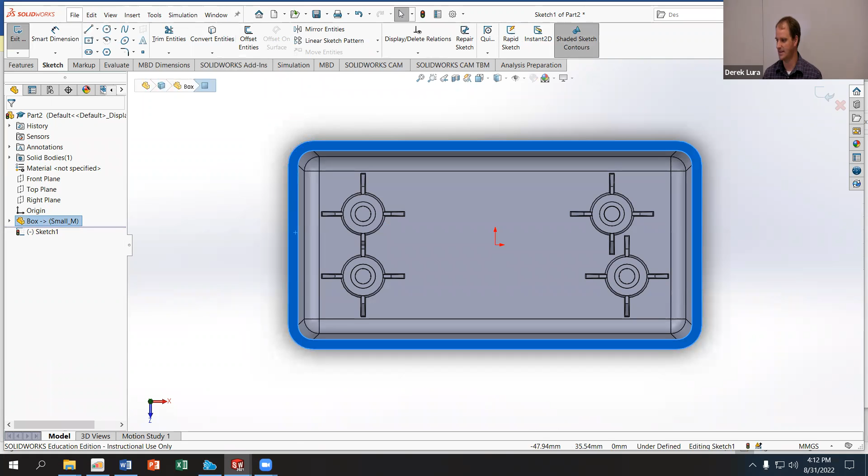Now what I'm going to do is I'm going to use this to draw the parameters that I want to use for my lid. So I'm going to go to the top plane on my box and I'm going to sketch. And I'm going to convert the entities of the top of the box. See that? So now I've got a sketch that is exactly the same size as the top of my box. And I'm going to extrude that out. And I'll make it, let's make it like 4 millimeters tall. And I'll add a draft of 2 degrees to it, even though you won't be able to see that very well. That's a pretty beefy lid.

Oh, wait. On this extrude, I'm actually not going to merge the result. This is maybe the first time you see me not use that tool. I want to not merge that. So this is going to be a separate solid body for the lid than for the box.

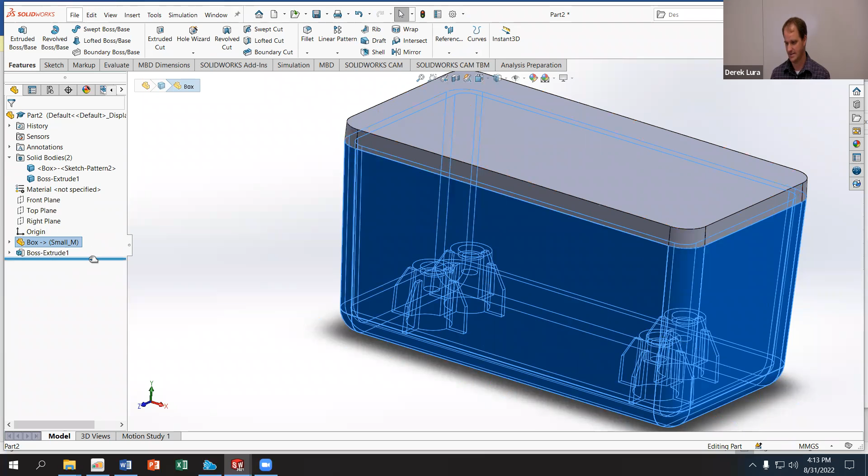Now what I'm going to do is I'm going to go back to, wait for SolidWorks to respond again. I'm going to do another extrusion that comes down from my lid that's just a little bit smaller than the inside of my box. So I'm going to go back onto the top of my box. I'm just going to hide this for a second so I can see it a little better. I'm going to sketch on that face.

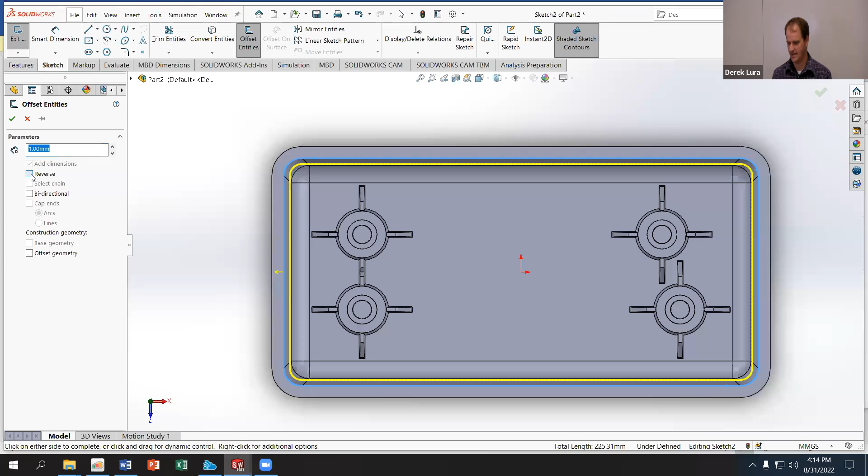I'm going to offset from the perimeter of the inside of my box. I'm just going around selecting all the edges. I could probably do select chain. It would be a little bit faster because I only have 2 of them. I'll do a 1 millimeter offset into my box. Everybody see that?

And then I'm going to extrude that down into the box. And again, I'm going to use the same 2-degree draft. And this one I can merge with the top. And so when I show this one, that I did 2 millimeters down into it. That's probably too much. I just did 4. Let's just do 2. I don't like how big this box is. I'm going to make it 2 as well. If you go through the workout, I actually make this lid a little bit more complicated. But I'm just making it a little bit quicker this time.

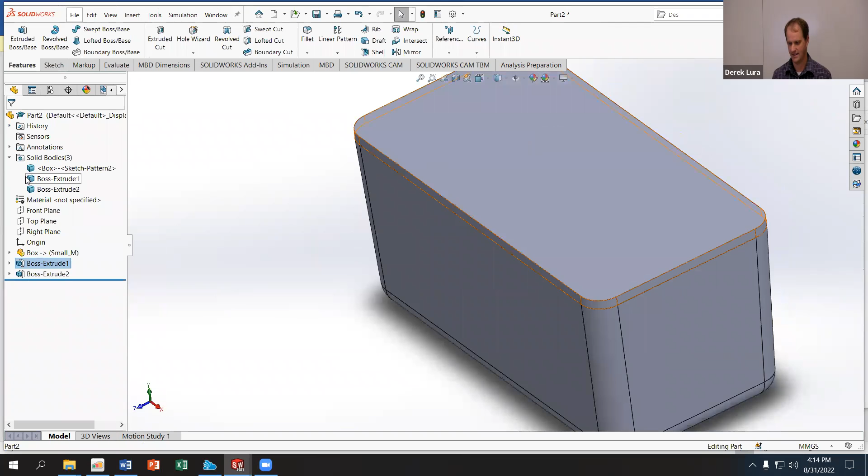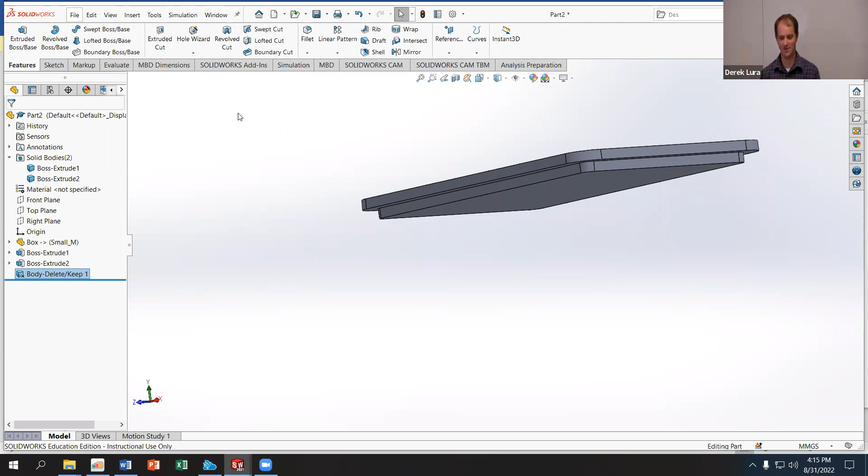So there's my lid. Now what I can do is I can actually delete this solid body. And I did that by clicking on delete on the keyboard. Although it's important to note, when you delete a solid body in SolidWorks, it doesn't actually delete it. Instead, what it does is it makes a feature that removes the body from the model tree. And so you'll note that I have this delete keep body. I can suppress that just like I did all my other features.

And then these other 2 I want to merge together. So I'm going to click on these 2 and I'm going to click on combine. And that's going to make them 1 by adding them together. So now I've got 1 solid body. That's the lid of my box. Yeah, so I unclicked the merge so that when I made the lid, I could delete the actual box itself and just have the lid. But since the box is still kind of there, it's just suppressed, any changes I make to the box will get updated in the lid.

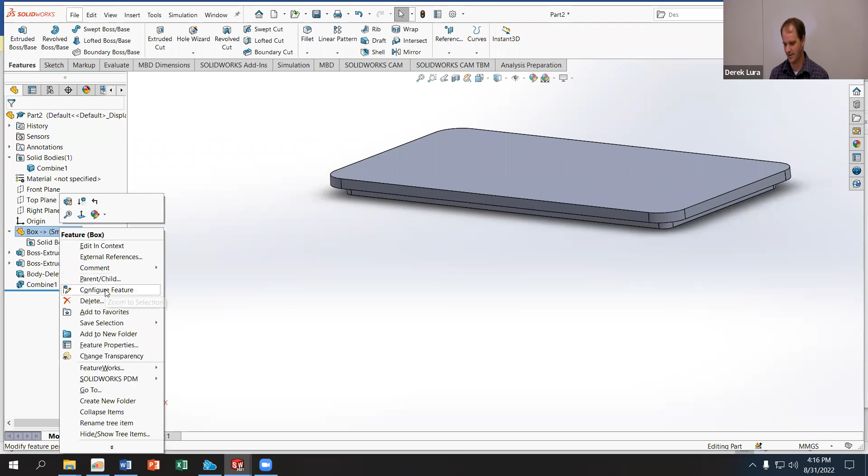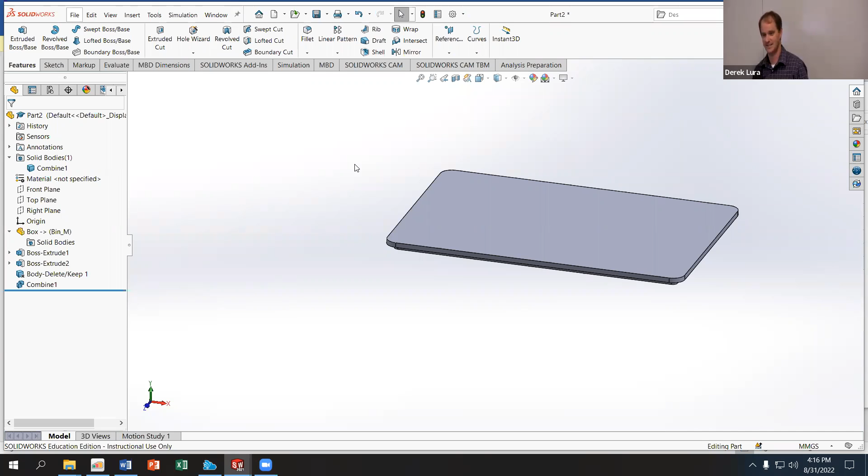So now if I want to change this, all I have to do is to change the configuration of the box inside this part. So I can configure this feature and I can say I want this to be the lid for a medium box. And it automatically updates. Now, they are separate. So the configuration of the box inside this part is not linked to the configuration of the box in its own part. So I can actually have a lid and a box that have different configurations, even though they're the same set of configurations in both places, which is good for some things and not good for others.

If I make an assembly, I'm going to go back to my box. I'm making an assembly from this part. Wait a second for it to load. I'll load in the box. I need to save my lid. I'm going to save this as lid, not load, lid. Then I can go back to my assembly and I can insert the lid. When you use that check mark, it fixes them by default. So I'm going to float the lid.

And then you can note here that my box configuration, since this is the large one and this is the small one, they're not the same size. But if I edit this feature, there should be configure feature on here somewhere.

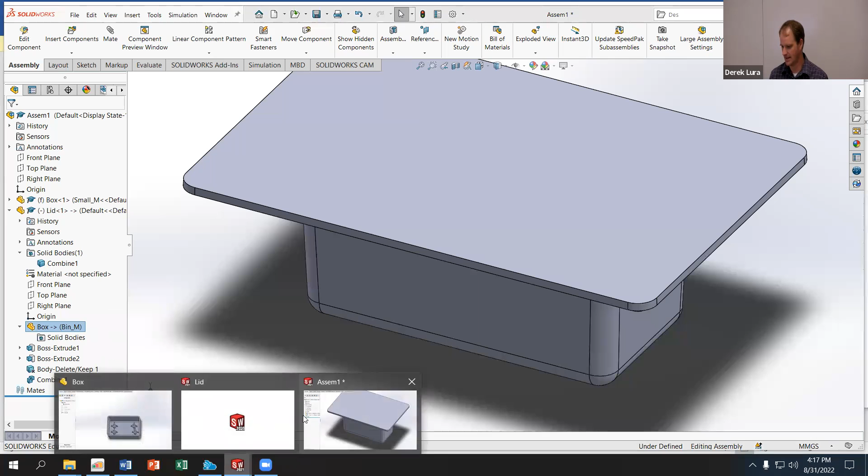Let me go to my lid. I'm just going to inherit the features from the box itself. So, configure.

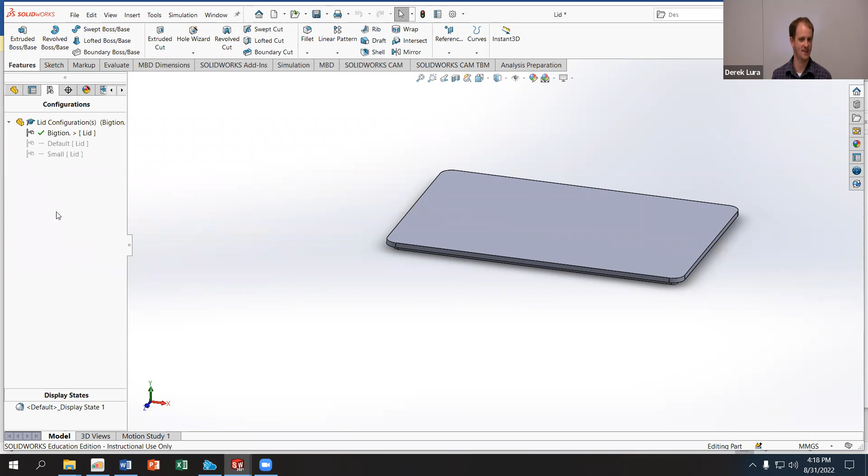I'll make this big. Not Biggington, come on. I guess it can be Biggington, fine. And since the internal features don't really matter, I'm just going to use big M and small C. Now I have two configurations inside my lid that are based off the configurations of the parts in my box. So now in my assembly, I can configure that more easily by just toggling it to small.

And again, here's my box. I can have it be whatever I want. So they align or don't align based off the sizes of the features.

And if you were doing gears, you can see how we could extract this back to the last lesson. I could have one gear part with a configuration based off the number of teeth. I can make a design table that pulled in my global variable for the number of teeth. And then I could swap the number of teeth just by doing a little drop-down menu, right?

So you can use design tables and global variables in conjunction. If you've got both of those linked out to exterior files, you're getting a little dicey in terms of making sure all your files are working together. But you can see how those kind of work or don't work to get different configurations out. Questions on that?

All right, that's it for today. Your deliverable for this week is going to be the box, the lid, and the assembly file. And I should be able to configure both the box and the lid to be big, small, with the mounting holes or the custom holes, the default kind of SolidWorks mounting configurations, or the one that we use with the lid without the parts breaking.

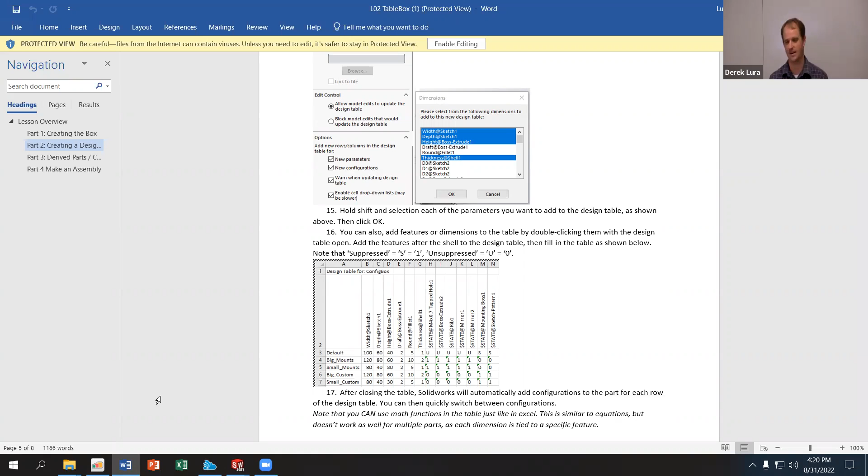If you haven't started working on your first project for the Rube Goldberg, thinking about the parts you want to make for that, I would expect that you would all have at least preliminary drafts of the parts for that project started by end of day on Friday. So if you don't have an idea of what you're doing for that, get that figured out sooner than later.

That first project is going to be due on the 16th, which is not next week, but the week after next week. So it's due on, I don't know, this date. So we're at the 31st.

We have next week. We're going to be covering advanced mates and motion studies in class next week. So if you have the parts that you want to use for your video or for your assembly ready for the end of next week's class, then you'll be set.

You can get that working in on Friday for next week. That makes sense to everybody? I'm hoping it does.

Did I publish the Dropbox for this week yet? So in the assembly, you just want one configuration. So the configurations are saved inside the parts. So I should be able to swap the configurations in the assembly to see that it makes all of the different configurations. I guess you need to submit the design table file too if you've exported that to Excel.

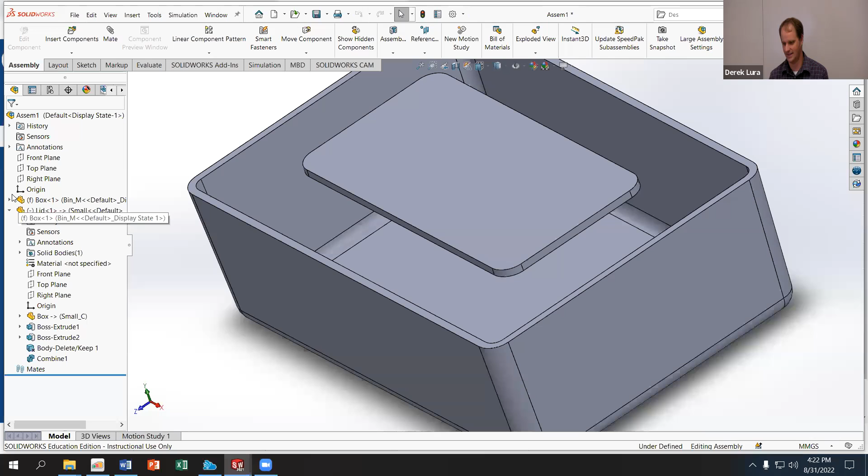It is worth noting that SolidWorks does load Excel to run the table inside SolidWorks. So, Evan, you'll note that when I double click on the design table, I go to one of the parts, and I do edit table, not edit feature, I actually get Excel tabs like in SolidWorks, which is kind of creepy. Like, this is Excel, right? It's not actually SolidWorks anymore.

Which, if I go to view, yeah, it's Excel except I can't zoom apparently. Like the zoom option is gone. It's grayed out. I don't know how to fix that. Can I control plus maybe? Nope, that's insert cells. I don't know, I'm sure there's a way of changing the view on this, I just don't know where it is.